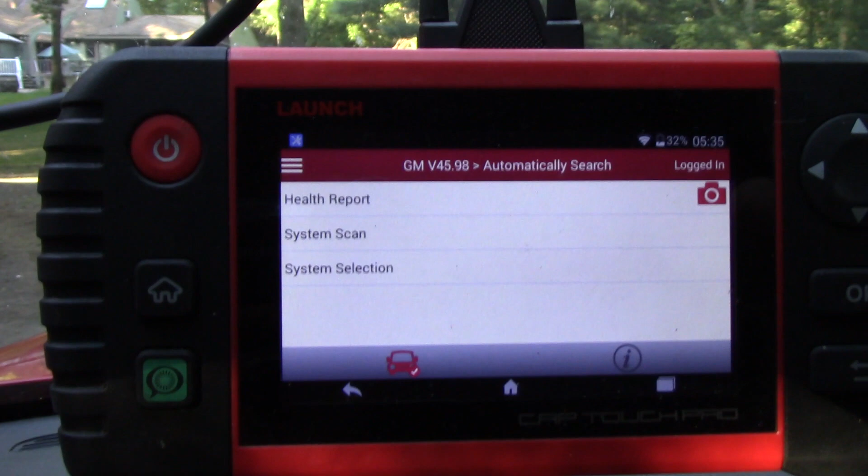I'm not sure if there's a way to tell which wheel had the ABS activation at low speed without a scan tool, because I believe if you unhook one of the wheel sensors, they need to talk to each other, so I don't think your ABS will work.

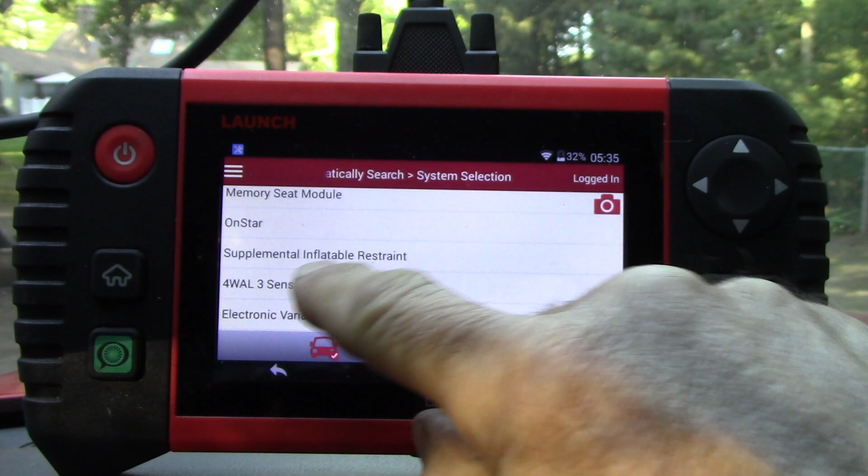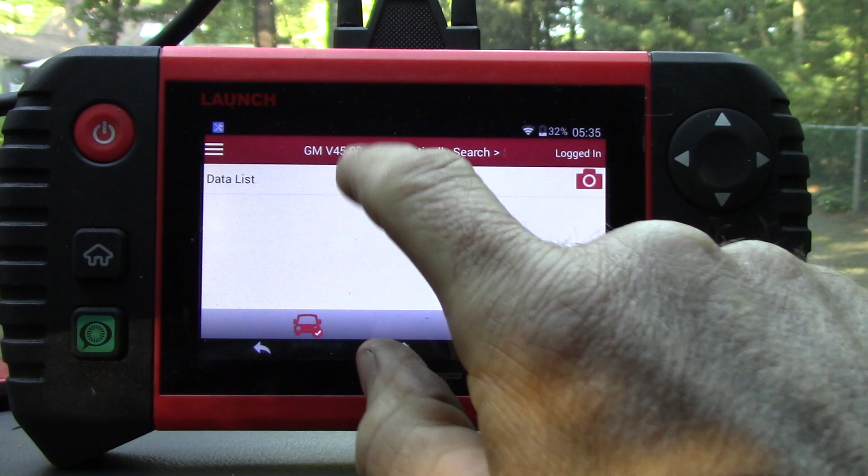So just unplugging one to see if the other side is fine won't work. Let me show you the symptoms I'm having. I want to get some PIDs pulled up so I can show you. I just want left front wheel speed and right front wheel speed.

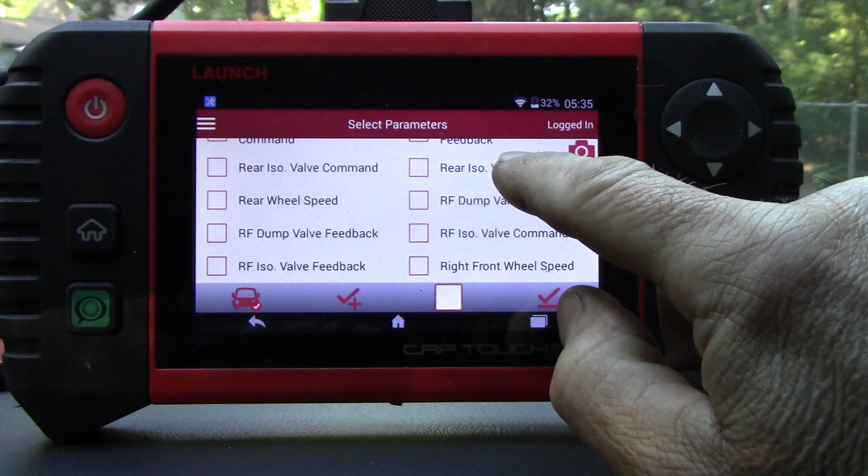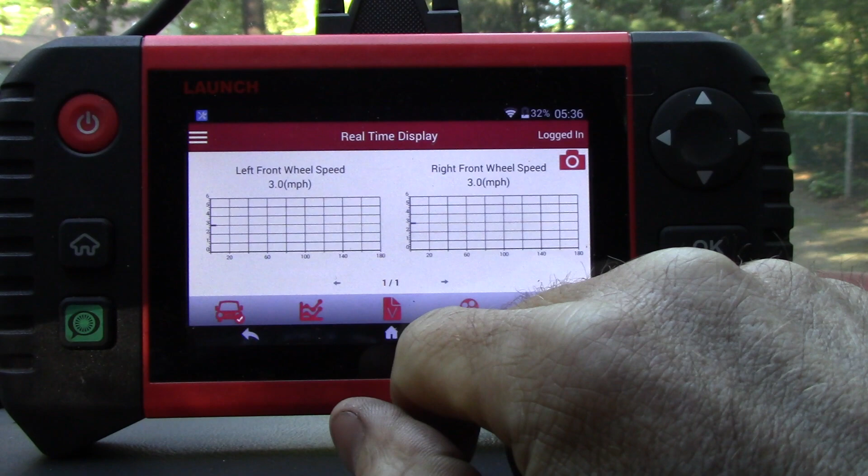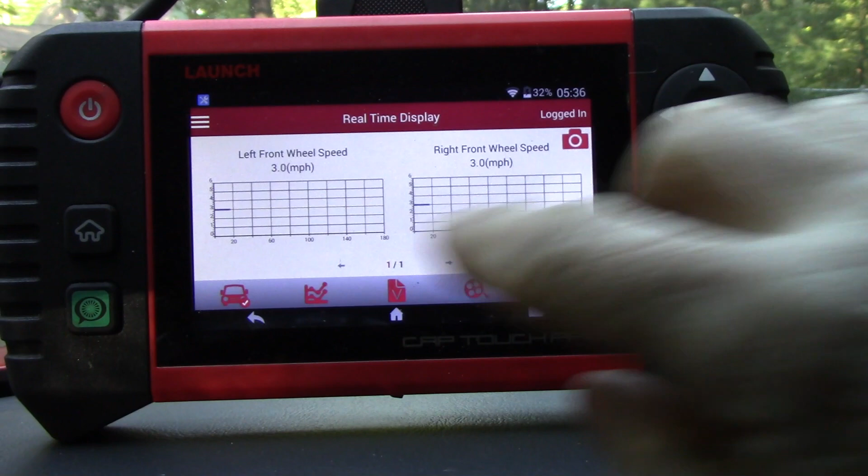Yeah, they start at 3 miles per hour, but I also want to graph it, because what I'm going to show you is one is going to drop out earlier than the other, and then you know that's the side. I think if I put these on top of each other, it might be a little better display, so I'm going to do it both ways. I'll do 2 runs.

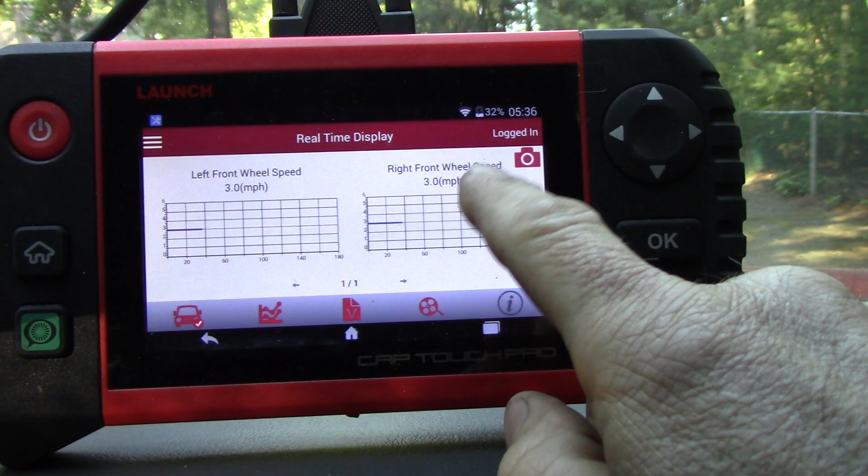So one of these numbers should drop out faster than the other for a failing sensor. Now, whether it's the sensor itself or the tone ring, that might be harder to diagnose, but usually it's the sensor.

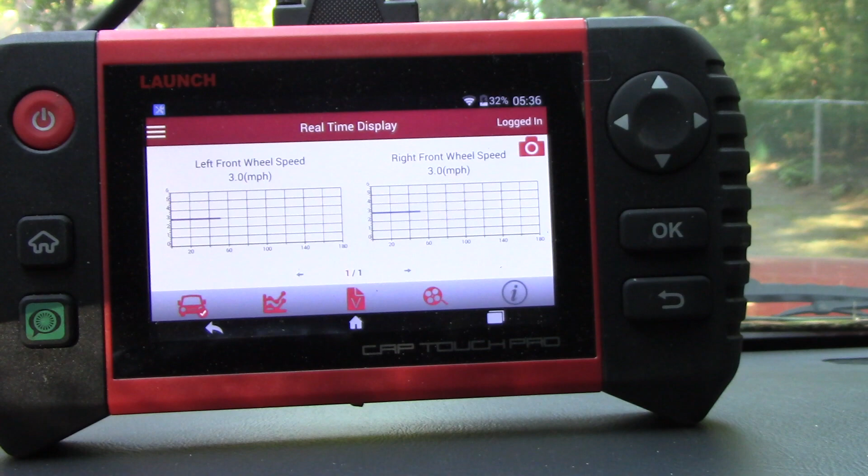But let's give it a try, I just have to drive basically 5 miles an hour, so let me get it up to speed.

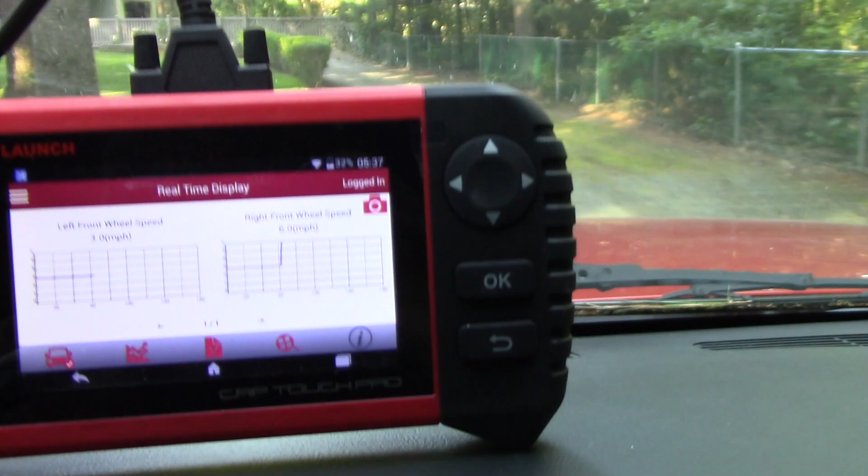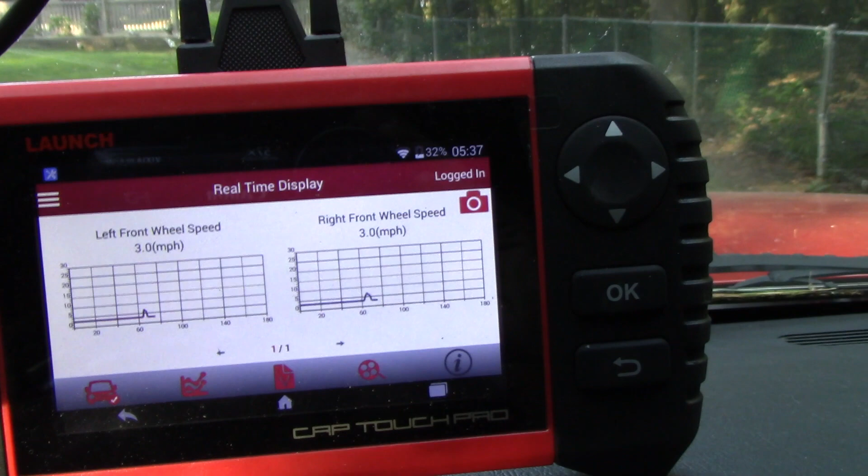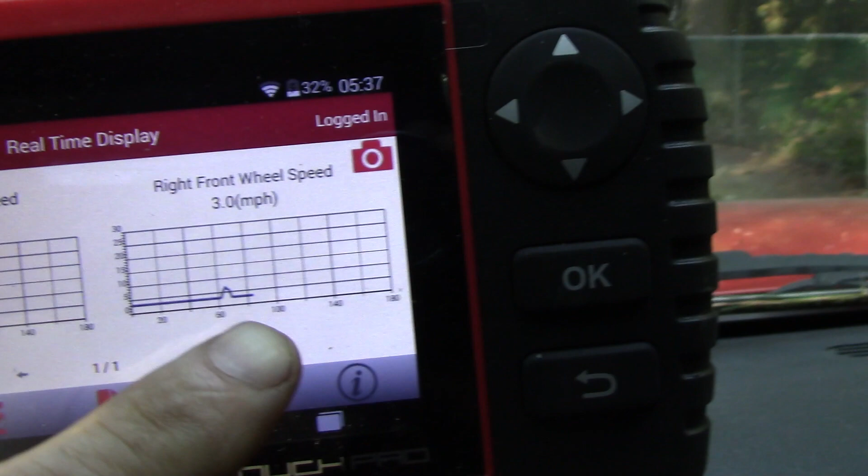Alright, so it's hard to tell on that one. I'll have to play it back because I can't see the numbers on the screen. But this graph, as you can see, falls off sharp, where this one had a gradual slowdown.

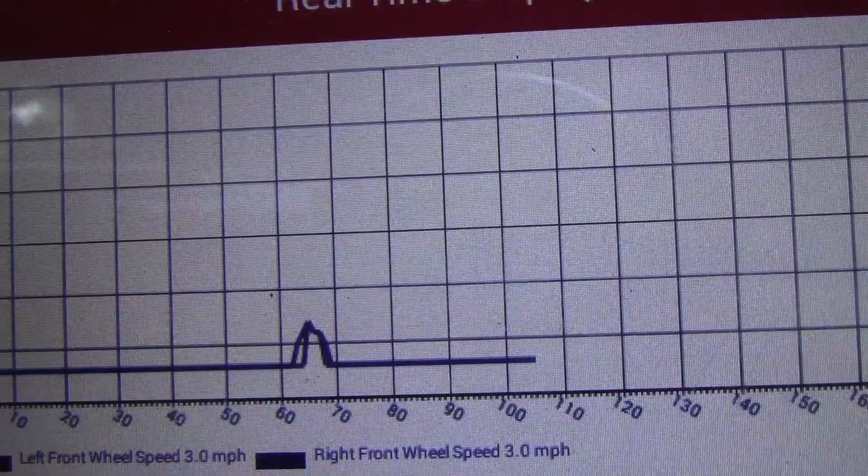I think if we put these on top of each other, we'll be able to tell better. Well, there you go, it's on top of each other right now from the history. I don't know if you can see that. See how the purple one fell, it's got more of a sharp curve. So that's the only way I can tell.

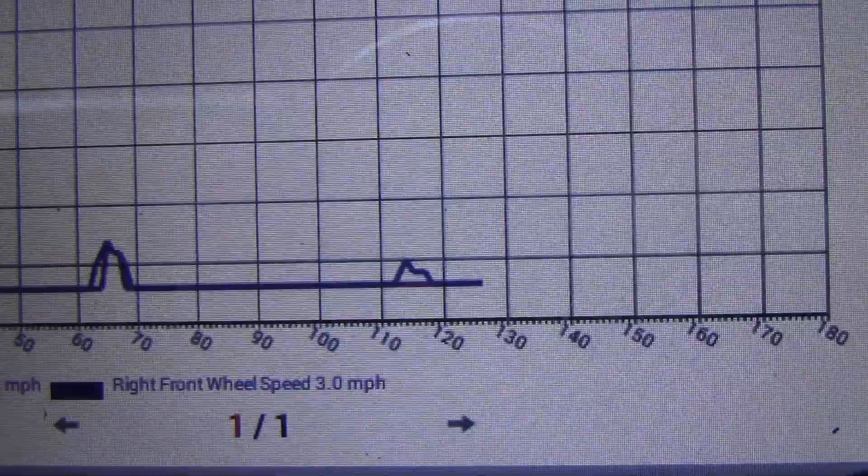But the reason I want to make a video is, hold on, let me try this again. Yeah, I can tell you right now, it's the left, right there. The ABS didn't come on, but the wheel speed sensor wasn't reporting. See how the left wheel never went up in speed. This one did.

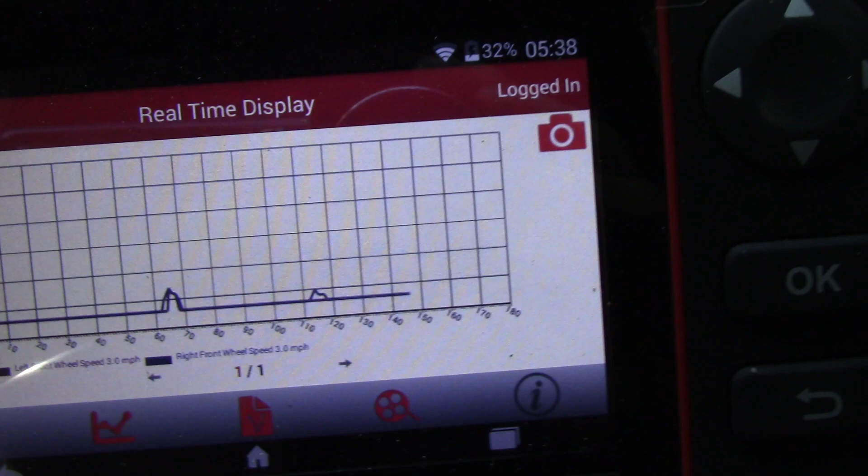So the left wheel sensor is definitely an issue. Let's see if I can get it to go. Let's go forward first, let's put it on top of each other. I gotta charge this battery, I had to change the battery on the camera.

So we're at, they're overlapping each other, and I wanted to see if we can get this steady, it's hard to hold this steady. Alright, so...

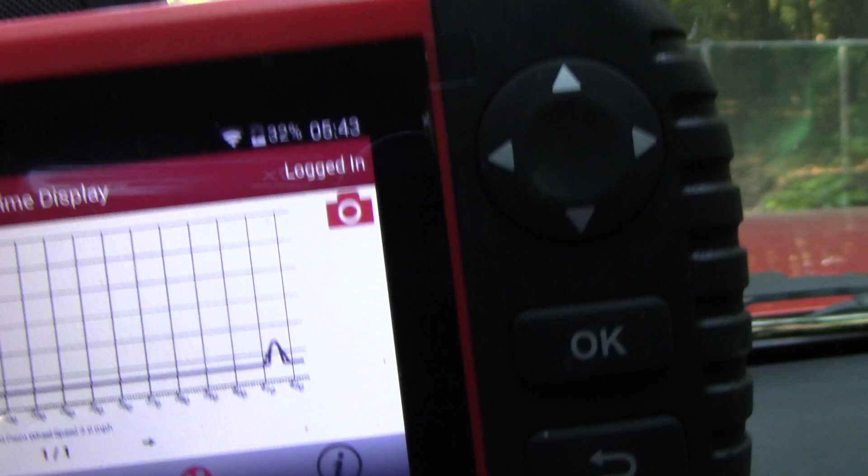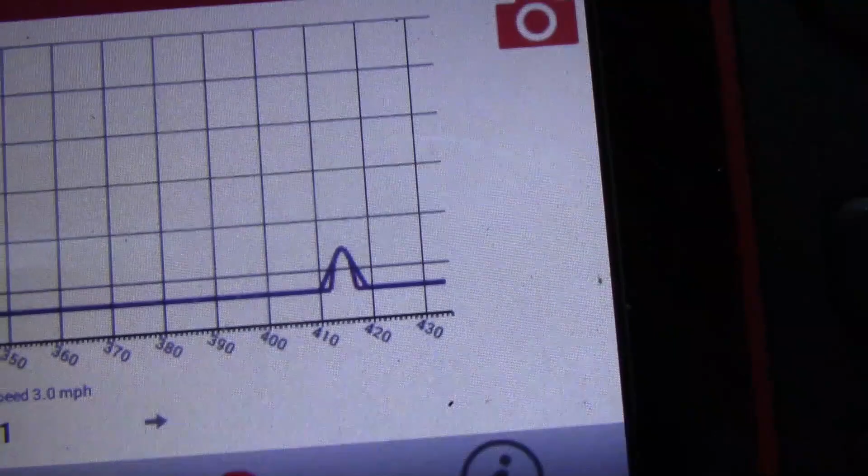As you can see, maybe you can or can't, but see how the purple, I don't know if you can make out purple and blue. I don't know why they wouldn't use red and yellow or something contrasty, but the purple is the one that's, again you really can't see that, but it's got a sharper drop. Here, let's separate it again.

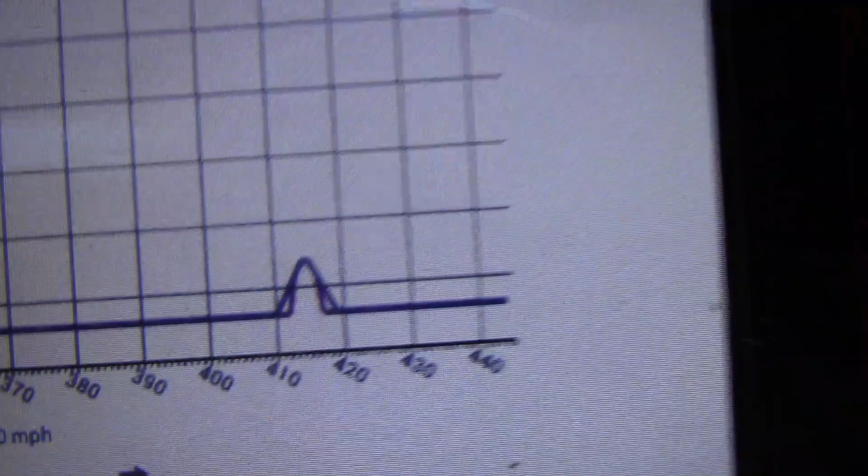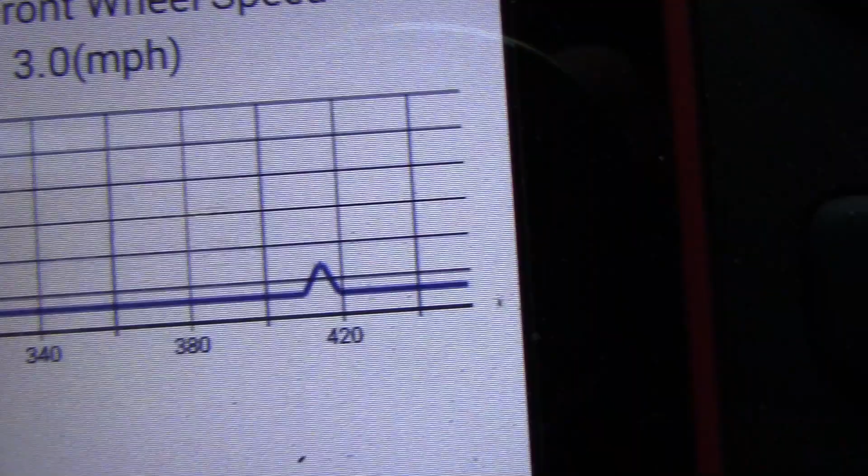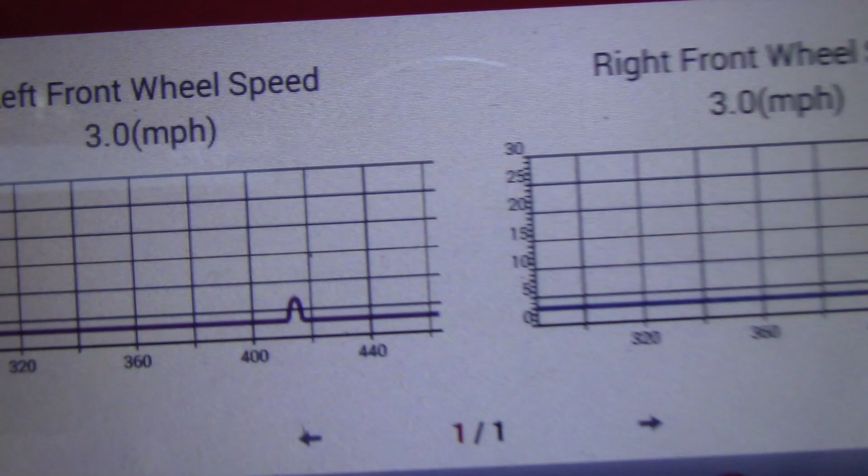The purple falls out a lot quicker, yeah? See how that's got a different curve, it doesn't fall as sharp as this one. So it's definitely the left side that is giving me the problem, and when you put them over each other, you can tell the difference.

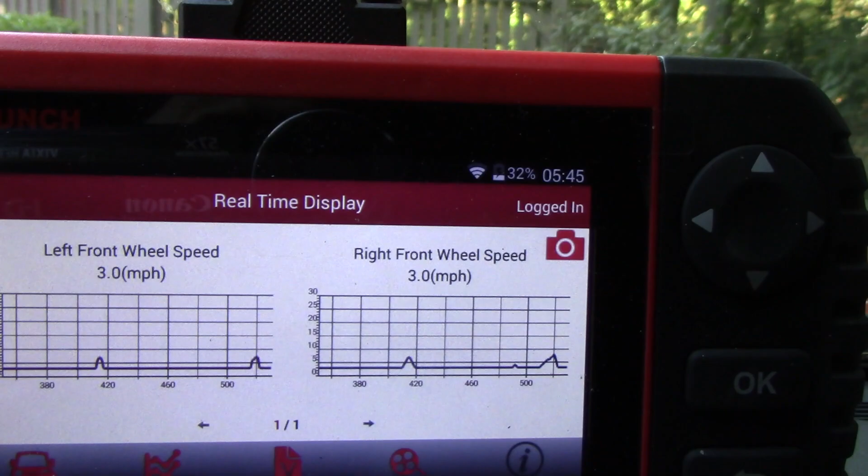Let's see what that looks like. You can't really tell because it's slow speed, but you can see the sensor started to bump up on the one on the right, which is a good one. The one on the left didn't really have that low speed bump like that one.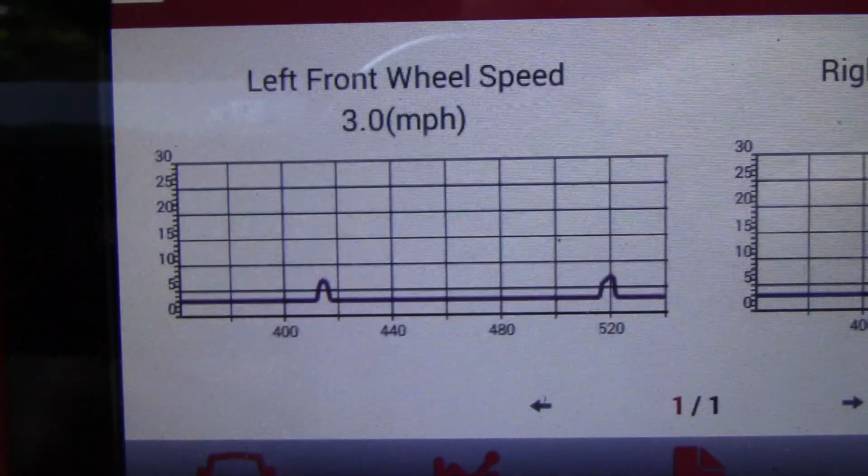See if I can do it one more time. It should get some speed in reverse. It's hard to tell there, but if I put them on top of each other, you can see clearly the blue one stepping up in speed.

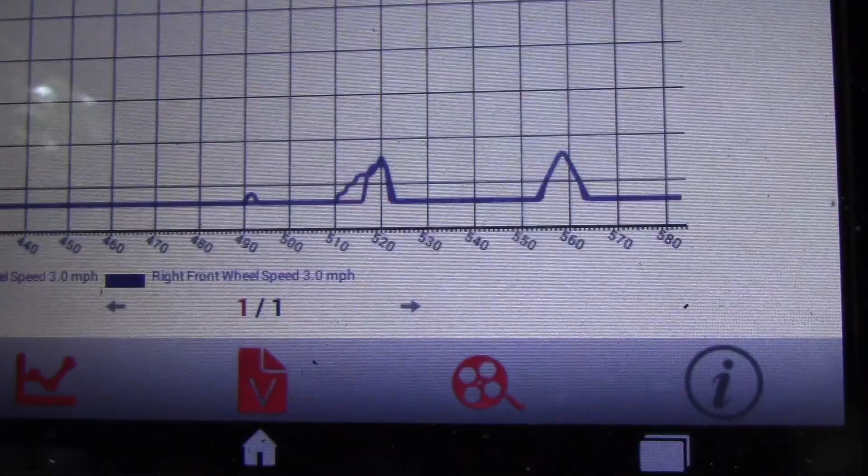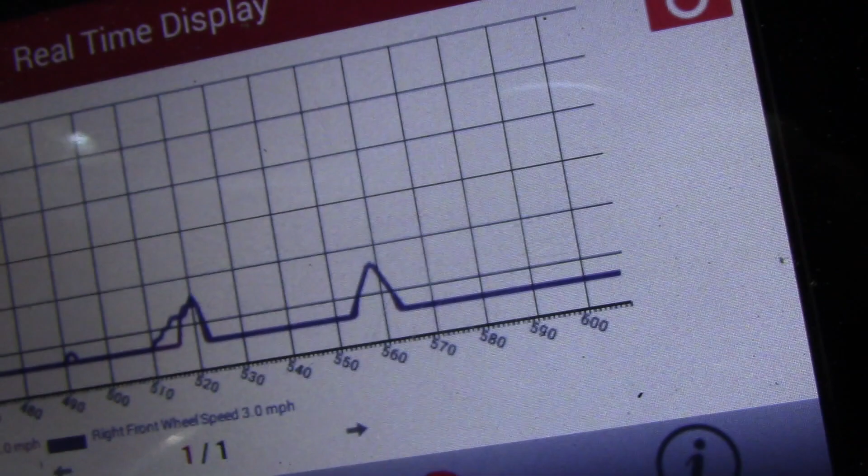Right here on this ramp, even this little ramp, the left never activated, so you can see clear as day the blue one stepping up gradually there, and for a second or millisecond, the purple never ramped up, and then it did. So it's definitely the left side that's giving me problems here.

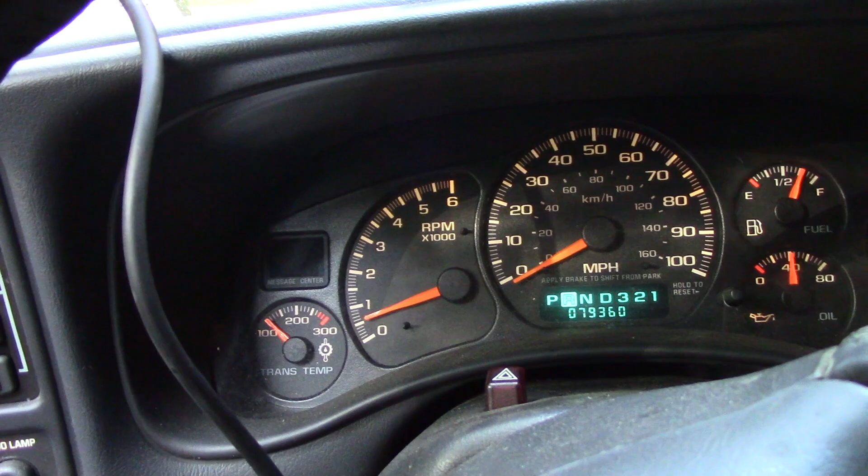So what to do? Well, like I was saying, first of all, you get no engine code, you know the ABS comes on at like 5 miles per hour, and you don't know which side it is. I mean, I guess it could even be the rear, but usually the rear is inside, I don't know what it is on this, maybe the transfer case or the differential, I don't know where it's located, but it runs both wheels, it doesn't have a separate wheel sensor.

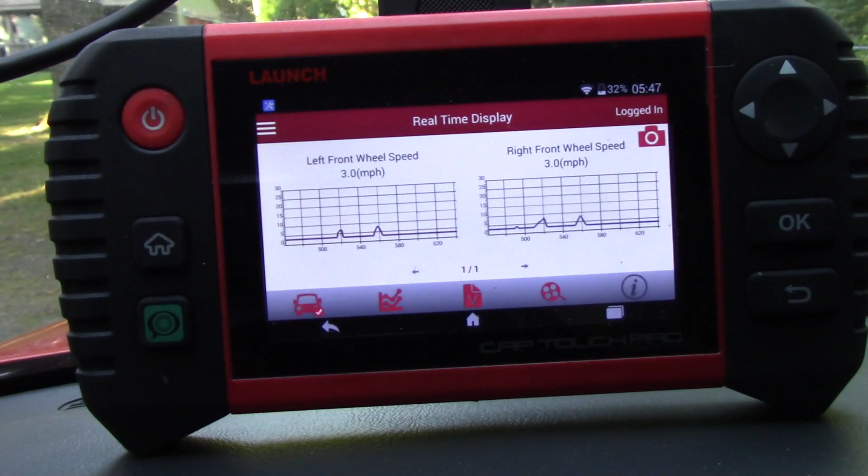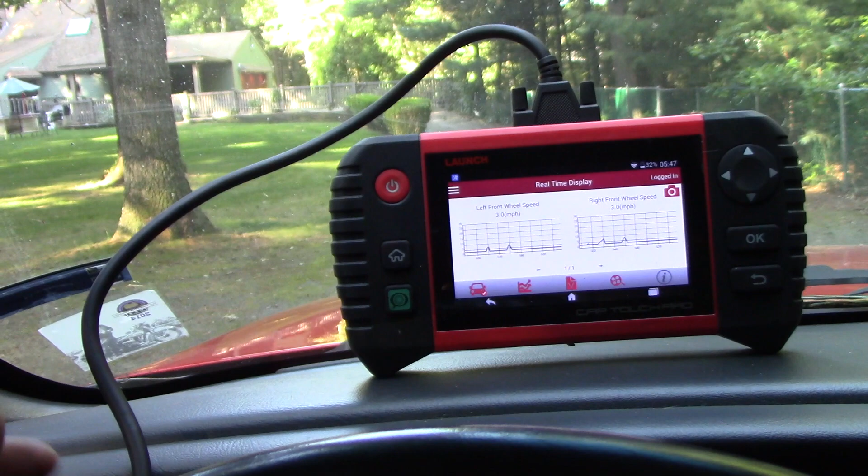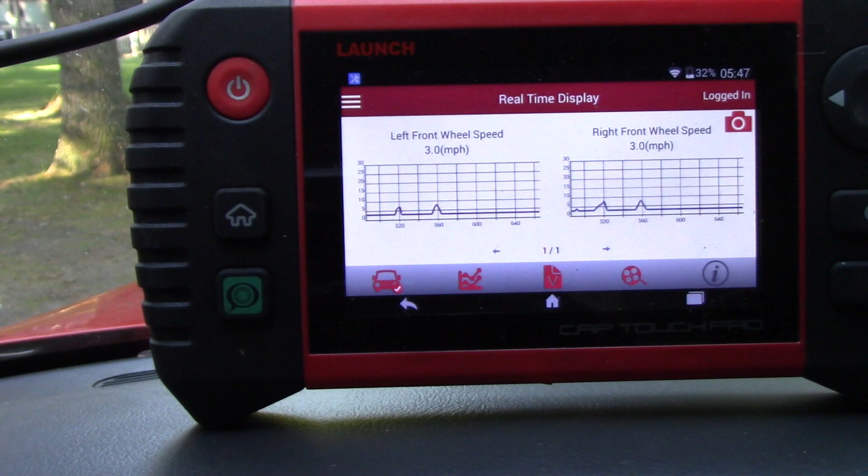These two, front left and right, how do you know which one it is if you don't have a scan tool? Because, like I was saying, I believe if you unhook one, since they have to talk to each other for road speed and engine speed, all these inputs to the computer, if you unplug one, I would think the other, like your ABS, wouldn't even work. If one's unplugged, you'd probably get a light and nothing would work. That being said, there's no real way to test which one it is.

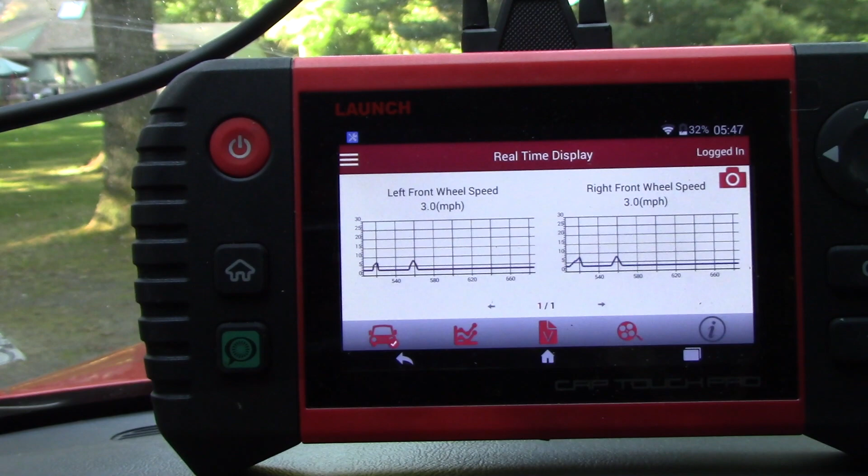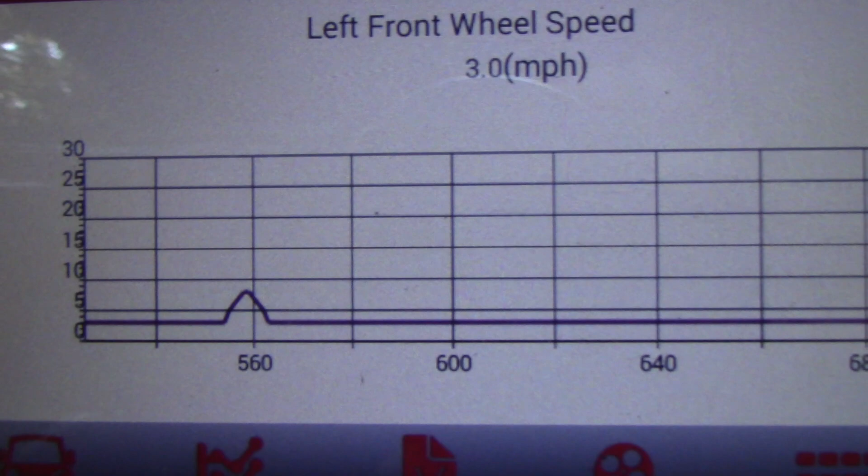I guess you could put it... well, you couldn't even do that. It's going to create voltage even if you spin the tire and measure it on just the sensor alone, because the sensor is working, it works, but it's failing because it's not registering at these low speeds. It's starting to fail, so the ABS pump is kicking on because it thinks the wheel's locking up, and it's not, because the wheel... well, it's gone now, but you get what I'm saying.

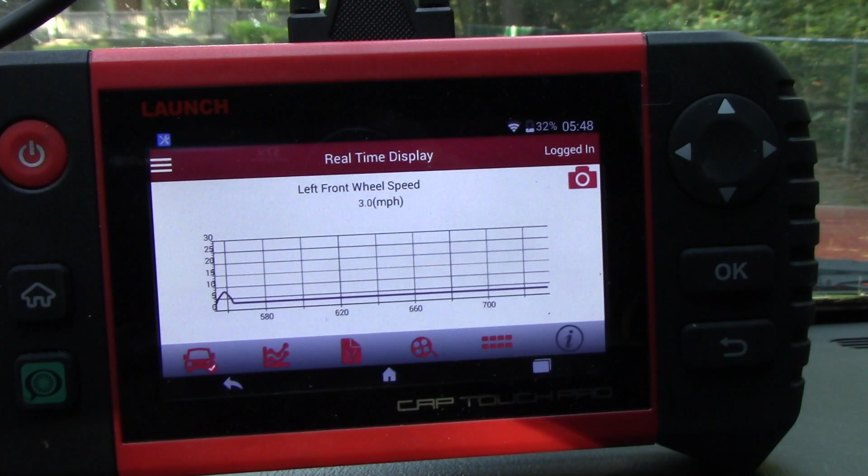So is there a way—see, I know it's the left front, but my theory is, can you bypass one sensor to make the other one read for both, so the computer thinks everything's hunky-dory? I'm going to put that theory to the test. I think you can, just with the signal wire. If you have the one good signal wire on the right and jump it to the left side input, why wouldn't it work? It's just a wire. So I'm going to test that, but I did get a new bearing anyways.

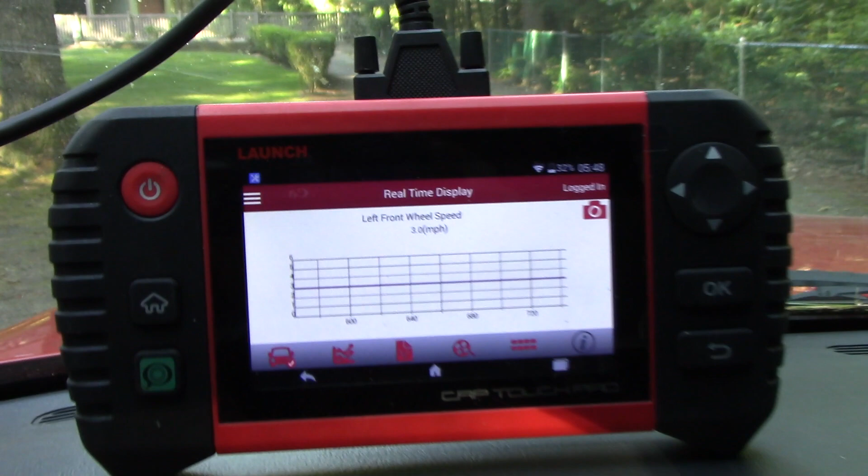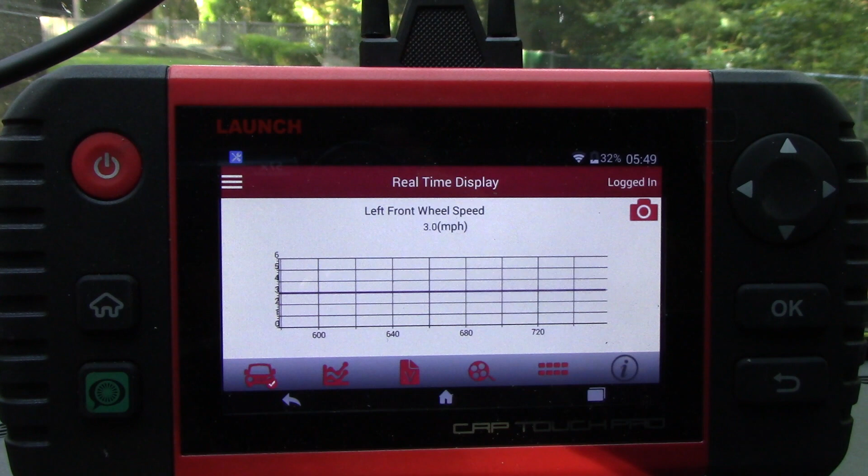The reason I got a new bearing is because the sensor is located in a way where I have to take the rotor off to get the sensor out, and that alone is going to be problematic because I'm going to damage the rotor. These things have been on a while, and you can't get them off because they're rusted on there. You know how it goes. I don't want to damage it. This is the problem, why I can't just replace the sensor alone, because of where the sensor lives.

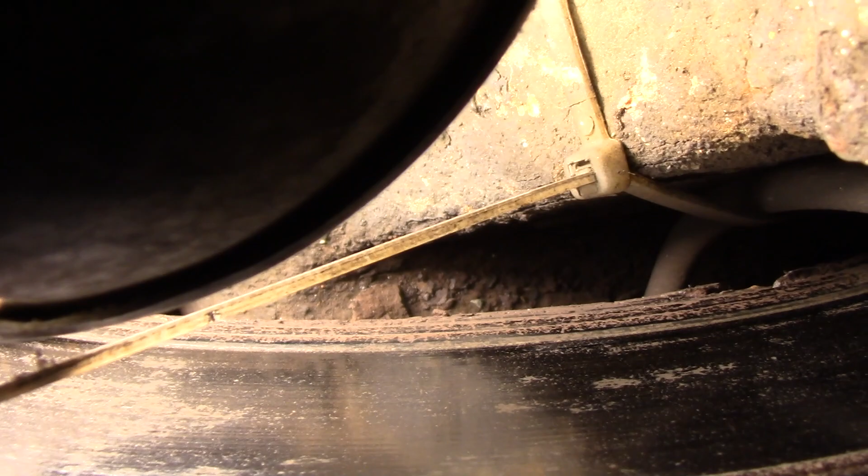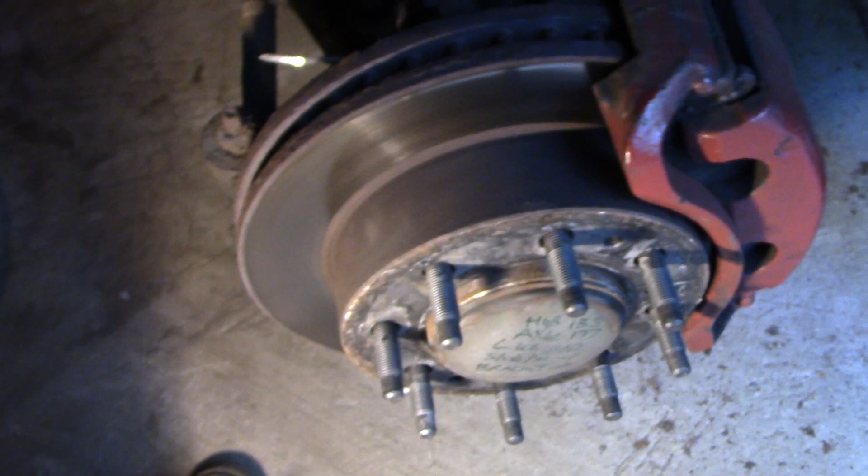Well, we're going to be able to see this. Yeah, not without a little light. Anyways, see where that wire goes? That's zip tied to the knuckle. This bearing was replaced about 3 years ago. I didn't have a problem with the ABS then, but just where it's located, that wire sneaks under and sits under this rotor. You can't get to the sensor with your Allen wrench there to get it out of the hole. So that would require you to take the rotor off.

I live in the Northeast. These rotors just don't pop off. They're usually pretty problematic, and this rotor's still good, you know, so is the brakes, so is the caliper. To get this off, I'd probably end up not destroying it, but definitely affecting the rotor, because I know from doing the other side—it got overheated, the caliper, so I replaced the rotor. The caliper got hung up over there, got really hot, so I replaced the caliper and the rotor. But I remember that was just a few weeks ago. Getting that rotor off was just impossible, beating on it, and it's going to tear stuff up. So I don't want to replace this rotor, and it's not going to come off easily to get the sensor out.

That being said, it may not be just the sensor. There's nothing wrong with the wheel bearing, but maybe the tone ring that's inside the wheel bearing is what's causing this thing to act up. That I don't know, usually it's the sensor. But what I'm going to try to do, I already got the parts, I'm probably going to do this wheel bearing and do everything new anyways to fix it.

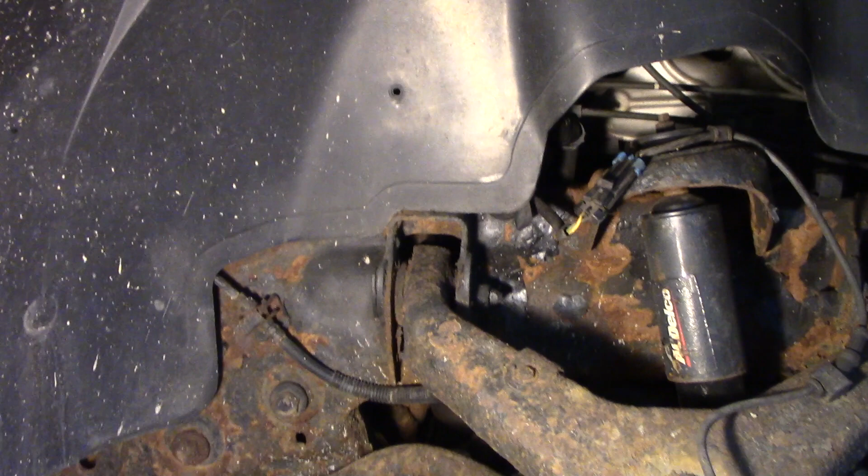But in the meantime, what if you're trying to get the vehicle inspected? What if you just don't have the money right now, or whatever? Is there a way to get around this? There might be, I'm thinking about it. What if I send the good signal from the other side over to this side? Just run a wire from the one good signal, unplug this whole ABS over here. Of course you're not going to have ABS, but I don't care about that. Let's say I just want to get this car inspected.

The guy goes to pull it in the pit, and ABS comes on because it comes on at a very low speed. He's not going to pass it. So I think I can bypass this, and I'm going to try it. I'm going to put my theory to the test. So I'm going to get a wire, and I'll show you what I'm going to do.

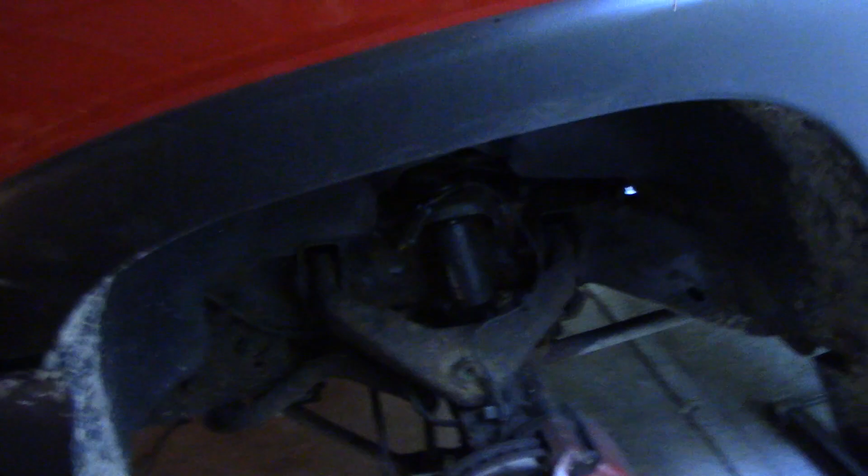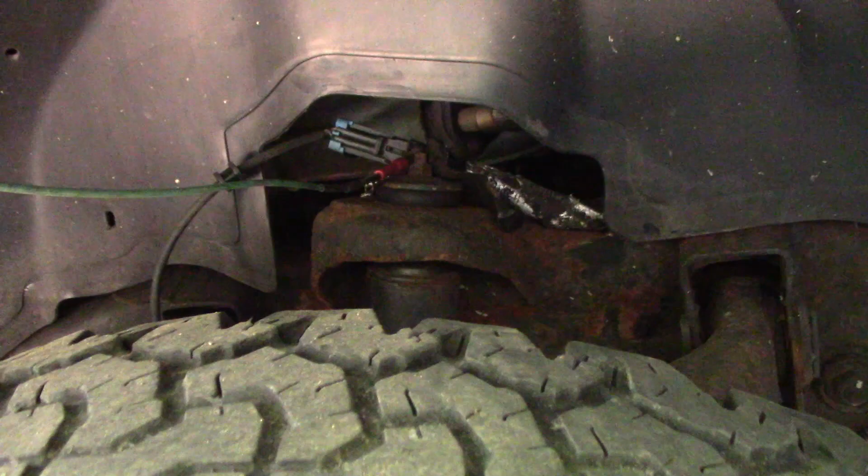Alright, so got the wheel back on. Like I said, I took - let me recap right quick, I'll take it for a spin here. I left this plugged in, this side, because the computer, or brake module, or wherever this is getting read, information is going to need the signal and the reference.

And then I got it snaked across here, and I've got this side just plugged in - first of all, I don't know if you can see in there, the wheel sensor is unplugged. So even though it's a 2-wire, I'm just using the 1 wire, the signal wire, the light blue wire. This is an old ABS sensor, so I'm using that because of the harness there instead of back probe, and I'll just splice it and alligator clip it.

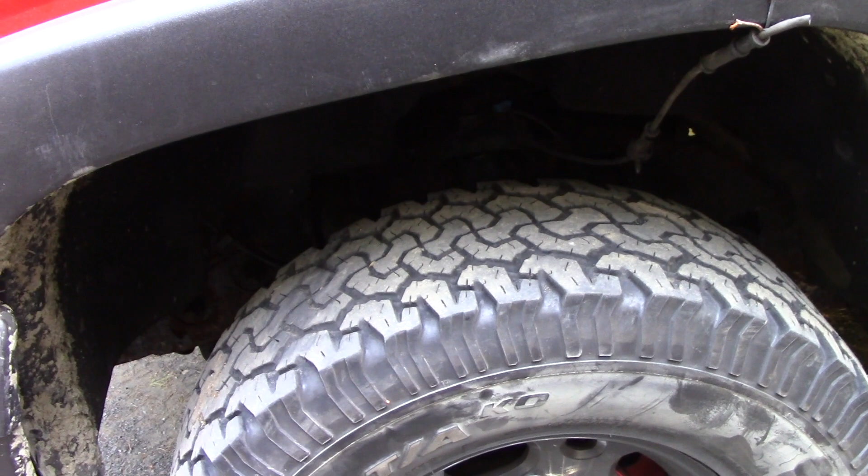So that's plugged in, and it's on the signal wire only. The reference wire, like I said, I don't think you need it because it's going to share. You unplug one of these at a normal condition, both of them won't work. If there's nothing wrong with your vehicle and you unplug one wheel sensor, the ABS system's not going to work, I don't even think it'll read it. Probably should unplug it too, but...

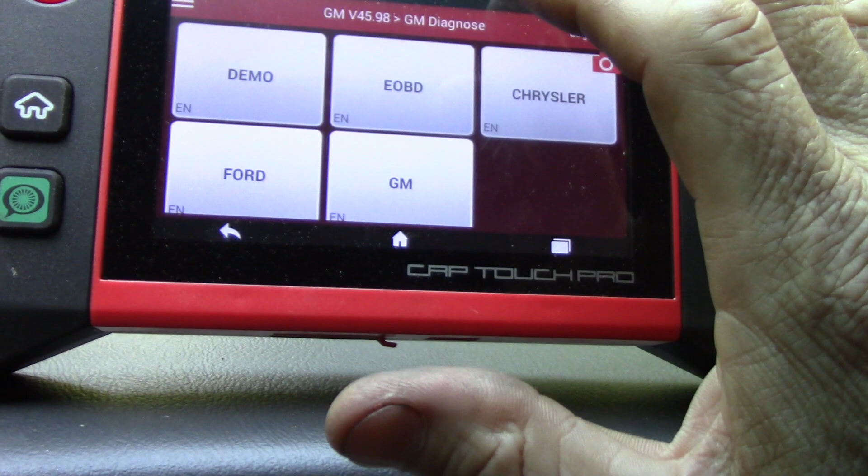Doesn't really need to be running, but... I don't know why it did that. Must have timed out.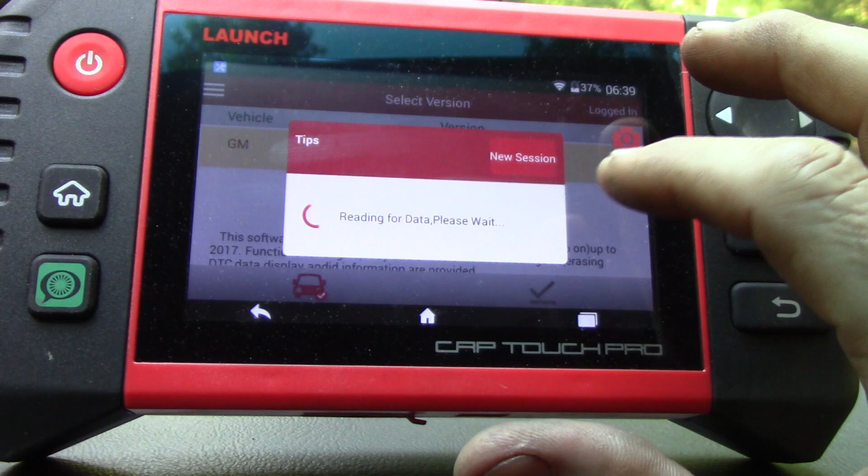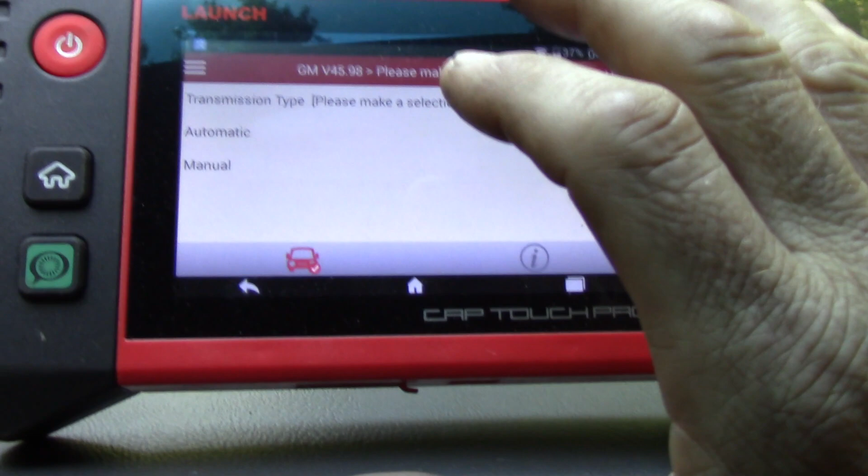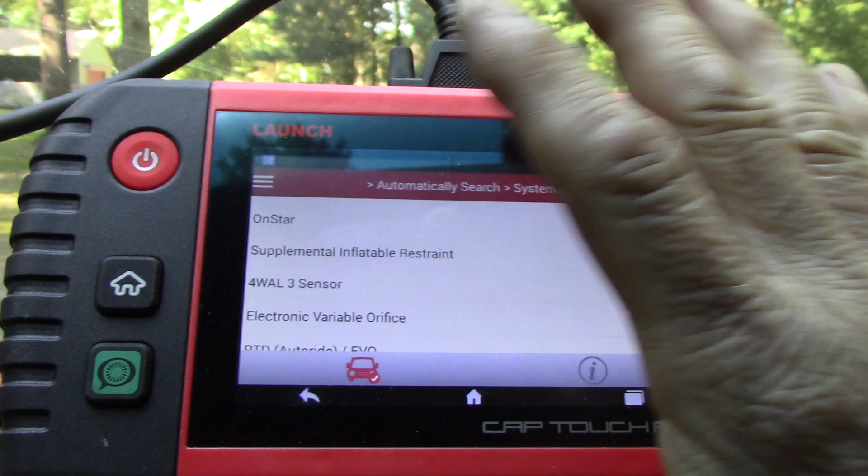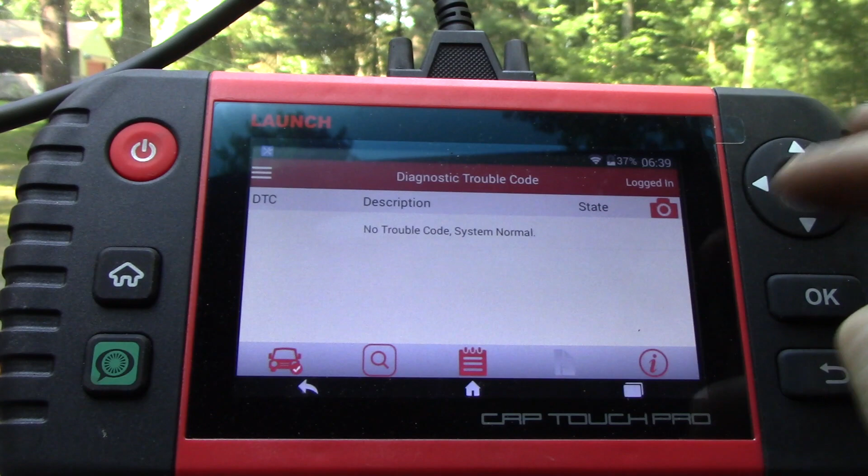Oh yeah, automatic. Yes, yes, yes, yes, system select. Diagnostic, trouble codes, current codes. Expecting to be - okay, no trouble codes. Currently, no trouble codes, which is good, because you can't get inspected with trouble codes.

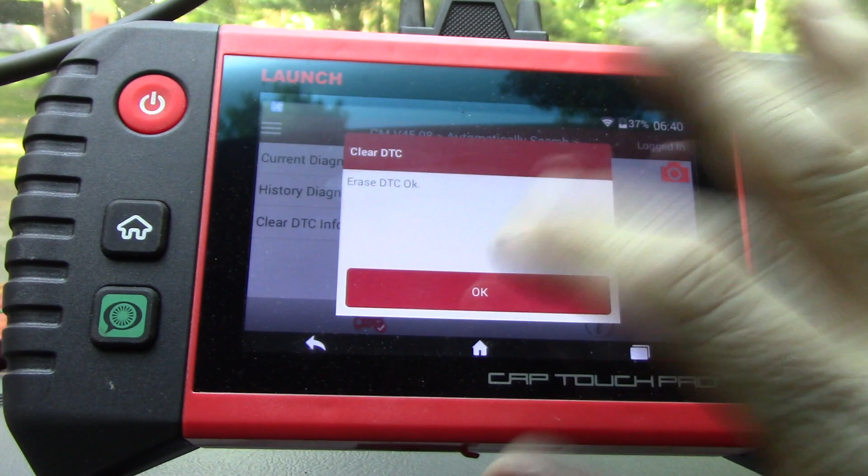I'm assuming it's probably because I unhooked it. Left front wheels, yeah, so let's clear that. So there's nothing in there because I unhooked it. It erased - okay, let's go back into history, see if there's any. Just erased it, shouldn't be. No trouble code, and there's no current trouble code.

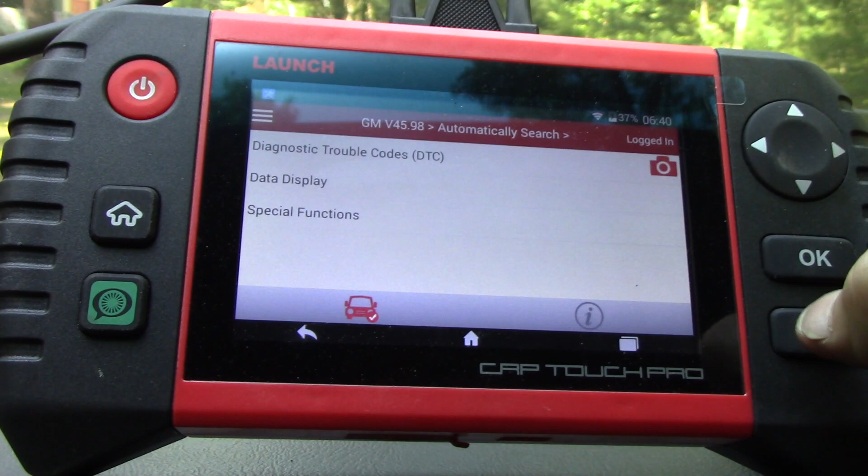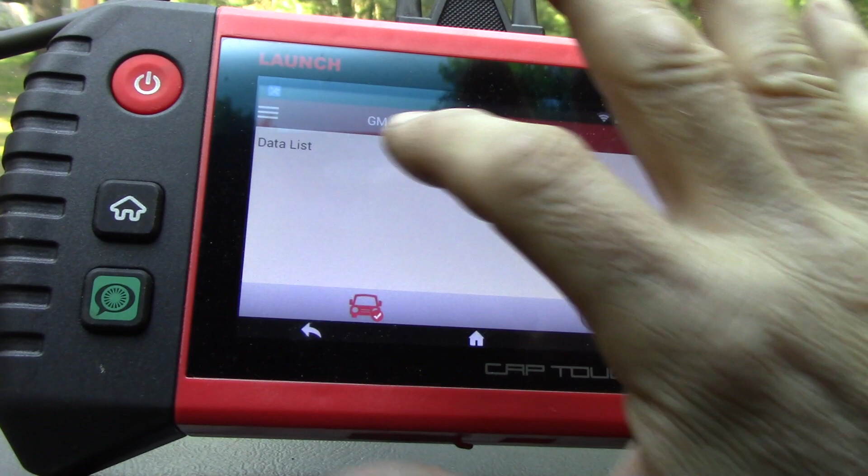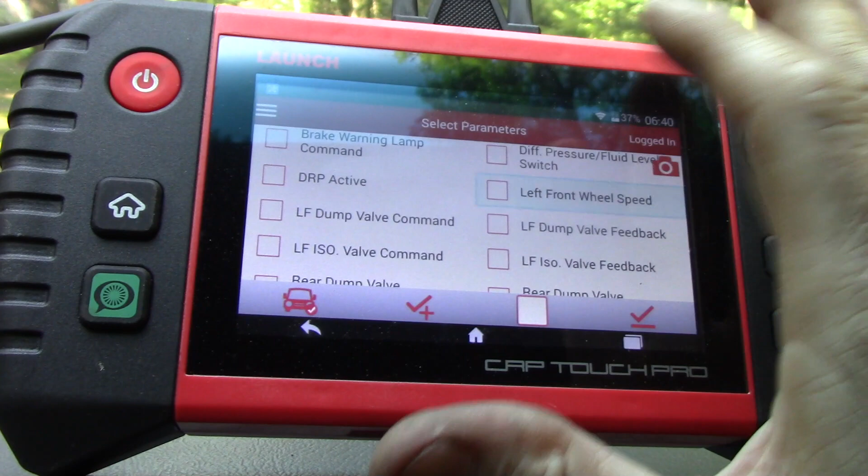So now let's get all the way out of there. Let's go in and get some data on those. Right front wheel speed - I'm assuming it's going to be nothing reported. Left front wheel speed. Oh, maybe there will be. I don't know. Okay, didn't think there would be, but that's even better. So it thinks there's a...

So again, I'm just using the one signal from the one side, so these should be identical. Well, let's see if we get any brake activation. Otherwise, this is for nothing.

Take her up - just above 5 miles an hour. That's all it took before. Look at that, nothing - no activation.

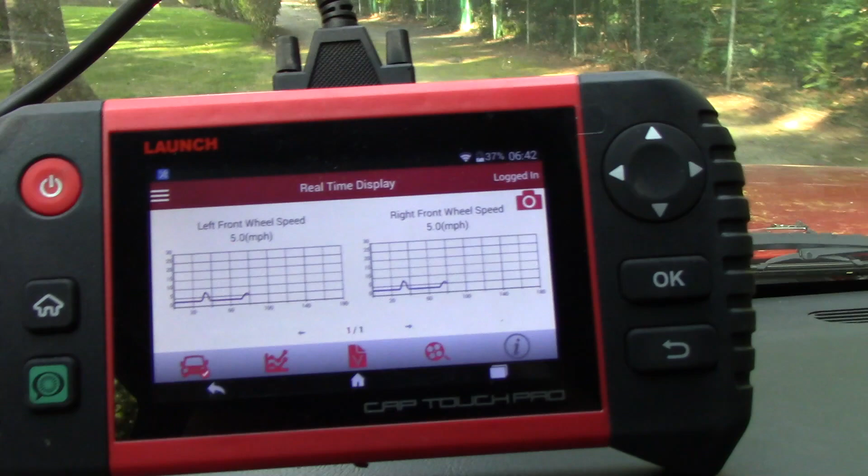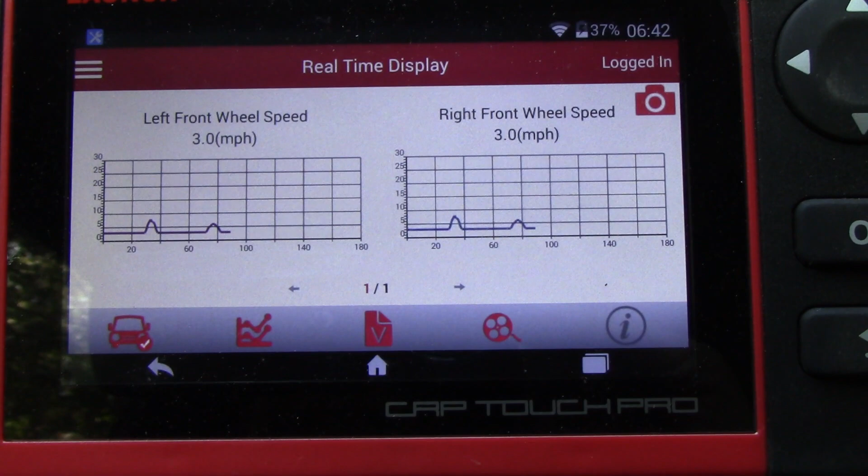And those technically have to be identical, they have to be. Reason being, it's just using the one signal. But it thinks there's two signals because, again, they share that low reference. So all you need to do is jumper the signal from one side to the other. And there you have it.

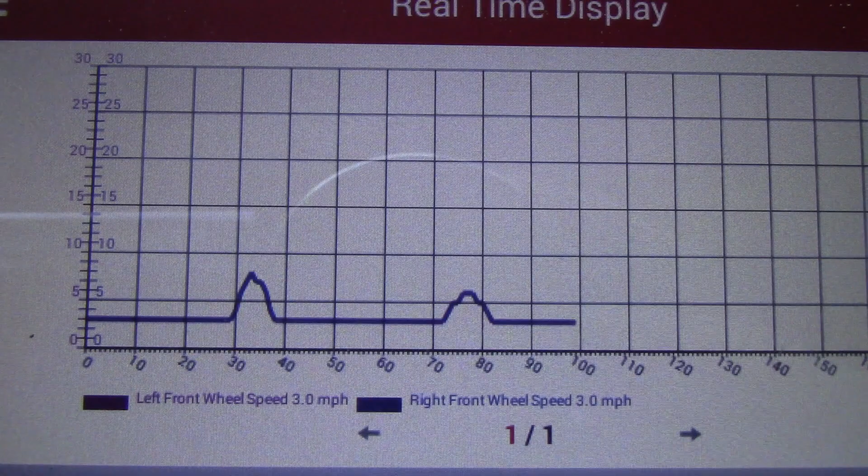Problem solved - problem's not solved, I still got a sensor bad, the left sensor is bad, but currently it's unhooked and the brakes are fine because it wasn't sporadic. It was every time 5 miles an hour comes, it would activate. I think I showed that more than once.

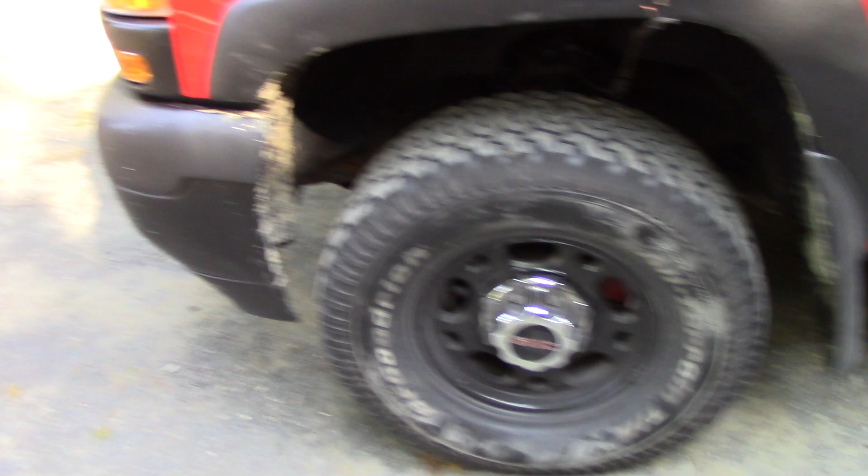So right now, I'll put these overlap each other - they're identical. So the computer's fine with that. All the wheel speeds are matching. Good to go.

Can't believe that worked actually. Obviously it is because it's working, so you just need the signal wire. Unplug it, signal wire to signal wire. Bada boom, bada bing. It's just using the right side to tell the computer the wheel speeds are identical. It thinks it's got a wheel speed on the left. You just saw on the computer it did. So there you have it.

I might wire that up and get it inspected. I already got the wheel bearings, so I'll probably do that, but they're a nightmare. So anyways, I just thought I'd share that.